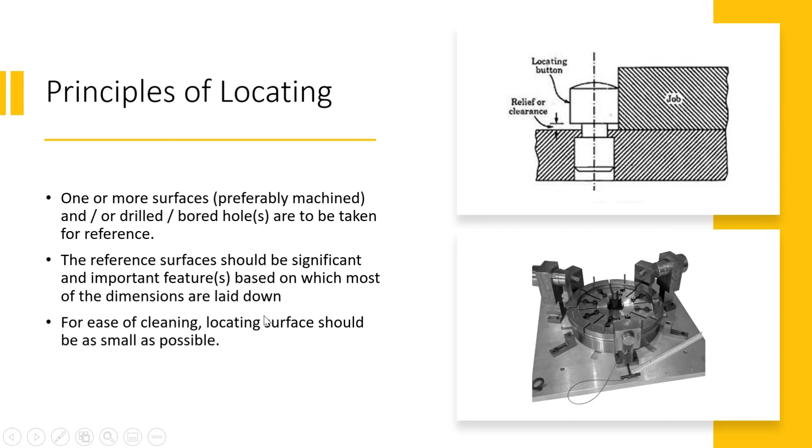Next principle: the locating surface should be raised above the surrounding surface. Now if you observe this figure, this locating button or locating pin has this locating surface. The workpiece will rest on this surface and this portion will raise the workpiece from the bottom plate, that is, the jig or fixture plate.

And this portion is to be inserted into the jig plate or fixture plate. So we require to raise the surface above the surrounding surface.

Next, sharp corners must be avoided for the locating surface. As there is a machining force, if you use sharp corners as a locating device, it may create some kind of distortion, and that may lead to a change in dimensions of the machined feature. So a sharp corner as a locating surface must be avoided.

Next, the locating pin must be easily accessible and visible to the operator. Whenever you put a workpiece on the locating pins, the worker should easily place it over them. Sometimes the workpiece is heavy, and it is not possible for the operator to see all the locating pins easily. So in that case, some kind of arrangement can be made for easy locating of the workpiece.

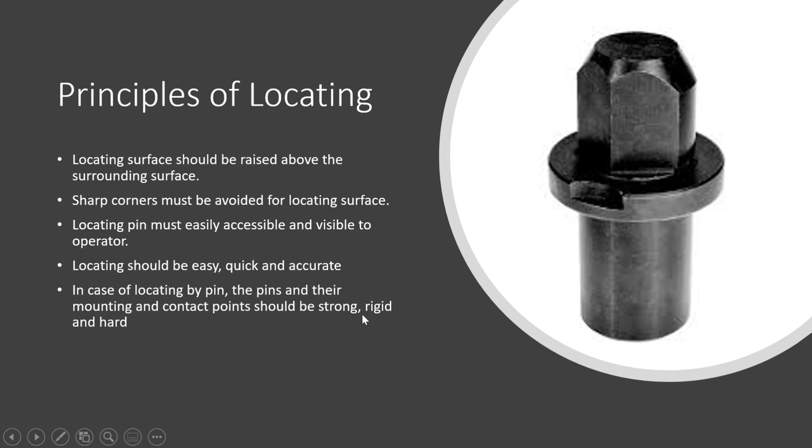should be strong, rigid and hard, so that it cannot be easily deformed, because while machining, in operations like face milling and side milling, there is more force. So to avoid distortion, the contact point should be strong, rigid and hard.

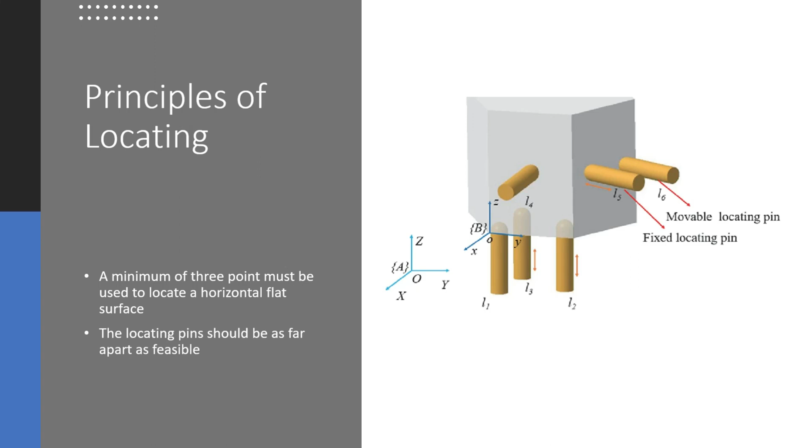So minimum 3 points are required at the bottom for the horizontal flat surface. The locating pins should be as far apart as possible. Too close may lead to fluctuation; it will not properly hold or properly position the workpiece. So as far as possible, the locating pins should be kept apart.

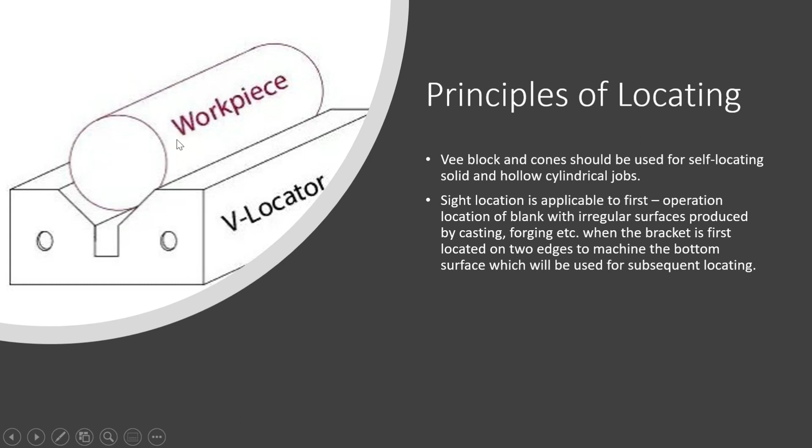Next is, V blocks and cones should be used for self-locating solid and hollow cylindrical jobs. The most preferable locator for cylindrical workpieces is the V block. Also we can use a clamping feature along with the V block for the ease of clamping and locating.

Then sight location is applicable to the first operation, location of a blank with irregular surface produced by casting, forging, etc. When the bracket is first located on the two edges to machine the bottom surface, which will be used for subsequent locating. Once the workpiece is manufactured from casting and forging operations, all the surfaces are rough. So considering these surfaces as a locating surface is quite difficult.

So irregular surfaces which are produced by casting and forging should undergo sight location. Then those surfaces can be machined or ground, after which that machined surface can be used as a locating surface.

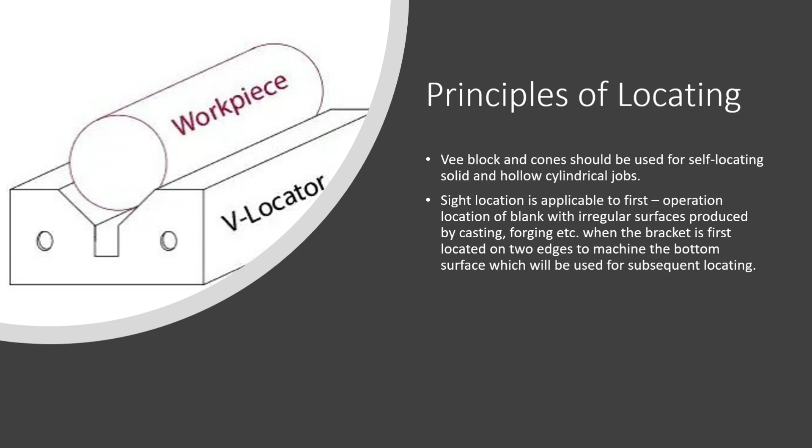Then next is principles of clamping. Earlier in the previous slides you have understood the principles of locating. Now we will understand the principles of clamping. Clamping needs to be strong and rigid enough to hold the blank firmly during machining. While machining, the force exerted by the tool on the workpiece is high, so to avoid any distortion or deflection of the workpiece, the clamping needs to be strong and rigid enough.

Next is, clamping should be easy, quick and consistently adequate. This is again like locating, which should be easy, quick and consistent. So in order to increase the rate of production and ease of the operator, it should be easy, quick and consistently adequate. Next is, clamping should be such that it is not affected by vibration, chatter or heavy pressure.

Sometimes if the workpiece is thin and you are putting more clamping force, that may lead to bending of the workpiece. So in that case, you must understand the sufficient clamping force required for clamping, and also the vibrations which are created while machining the surface. This vibration may deflect some, and that may create a minor error in the machining. So a finished workpiece may get rejected as a result of this vibration and heavy pressure.

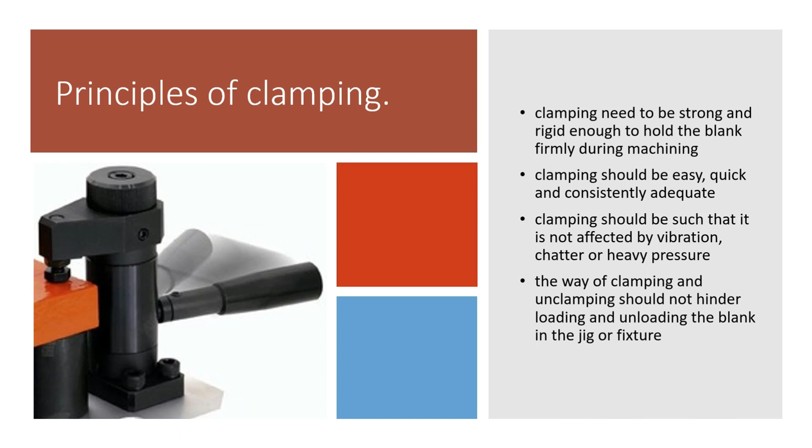Next is, the way of clamping and unclamping should not hinder loading and unloading the blank in the jig or fixture. The devices that you use for clamping and unclamping should not affect the loading and unloading of the workpiece. If it is creating trouble or taking much time, then it should be avoided, as more time will be consumed for clamping and unclamping. So to avoid it, you can analyze different clamping devices, and a preferable one can be used.

Next of the principles of clamping is that the clamp and clamping force must not damage or deform the workpiece, as heavy clamping pressure may deform the workpiece. If the workpiece is too thin or too small, then a low clamping force is to be used. If you observe this figure here, this lever mechanism of clamping is most of the time used for thin objects.

Next, the clamping operation should be very simple and quick acting when the jig or fixture is to be used frequently and for a large volume of work. The clamping time should be minimum, because loading and unloading time, locating time and clamping time are all considered as production time. So in order to reduce production time and increase the rate of production, the clamping should be simple and quick. Next, clamps which move by slide or slip, or tend to do so while applying clamping force, should be avoided.

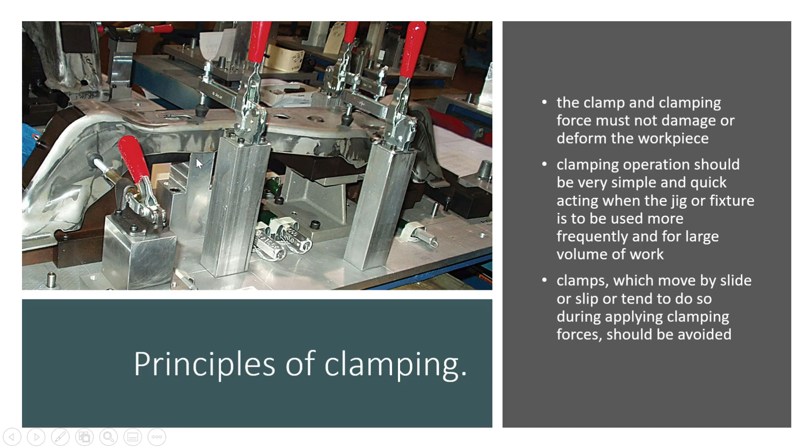Clamping force should act on heavy parts and against supporting and locating surfaces. So here in this figure, here it is the locating surface. You can observe this as a locating surface, and the clamping is applied against this locating surface. So for any support or any locating surface below the workpiece, you can use a clamping device above this, which will firmly clamp the workpiece on this jig and fixture.

Next, clamping force should be away from the machining thrust force. Here thrust force is generated while machining; when you use milling cutters for face milling, more thrust is developed. Not only for the drilling operation, where only a one-dimensional force is there, but in case of the milling operation, two-dimensional forces are induced. In that case, thrust force needs to be considered, so that the clamping force is sufficient to overcome this thrust force.

Next, the clamping method should be foolproof and safe. Foolproofing plays the most important role. So a small change in the clamping: if you increase the clamping force and the workpiece changes its position, then that may lead to incorrect manufacturing or machining of the surfaces.

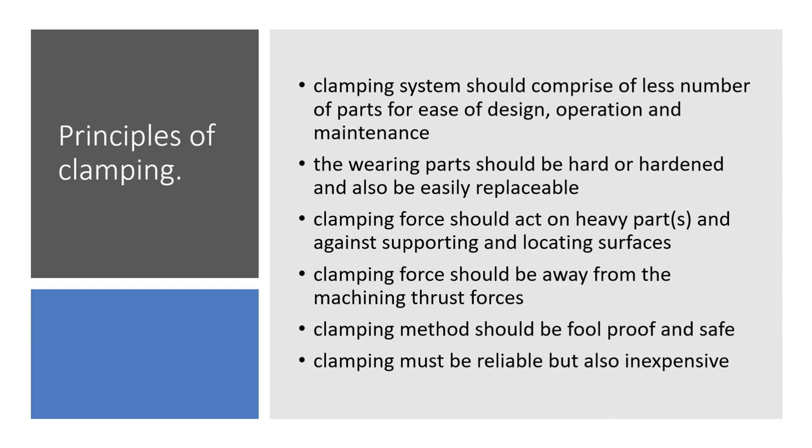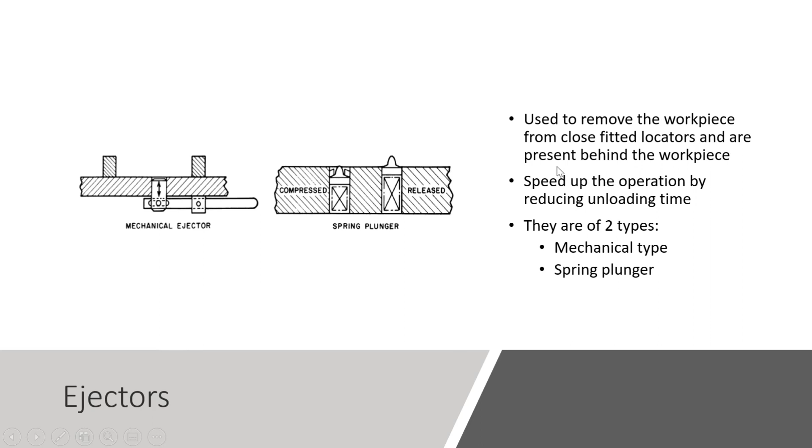The next part is ejectors. Besides locating and clamping devices, some ejectors are used in jigs and fixtures. Ejectors have a role to eject the workpiece from the jig and fixture device. They are used to remove the workpiece from close-fitted locators and are present behind the workpiece.